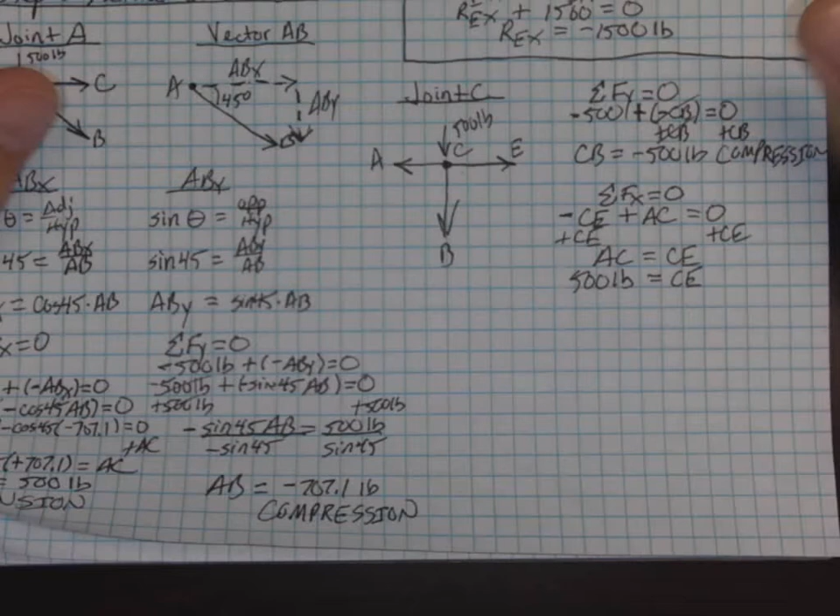Alright, in the last video we walked through the truss members. So right now as it stands, we have 4 truss members accounted for on this truss that we have for number 5 on activity 216. So as we take a look, we've analyzed joint A and we've analyzed joint C, and using those joints we're able to solve for 2 truss members each time. And right now we have 3 truss members left.

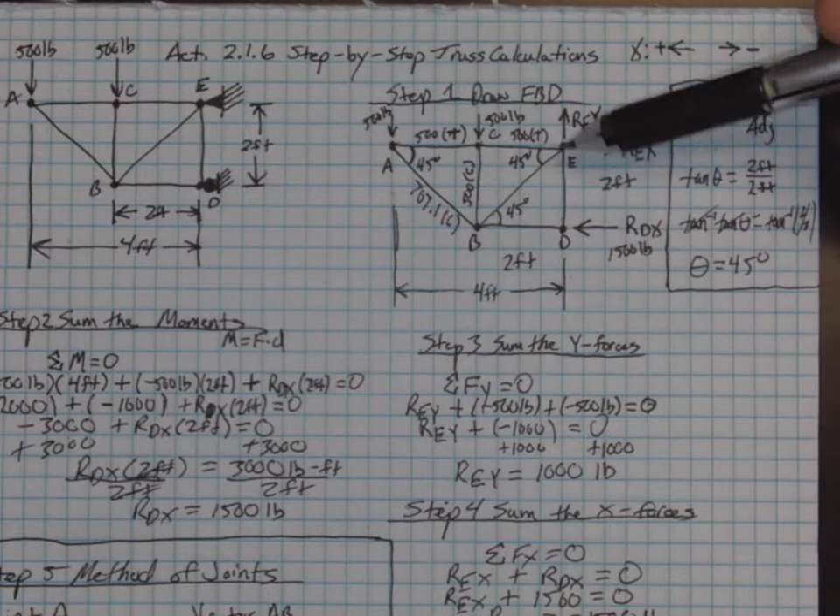And in order to start looking at what joint to use to solve next, I want to pick a joint that has the least amount going on with it. So right now, B has 2 vectors coming off of it. I really want to stay away from that because that's going to be a lot of work to do. E could be a possibility, and even with the support reactions, it just has the 1 vector pulling down and to the left. But I think the one I'm going to focus on here is going to be joint D.

And for joint D, I'm going to draw a free body diagram for the joint in the little bit of space I have left at the bottom. We have a truss member that's pulling up, which is leading up to joint E. We have another truss member that is going to be pulling on the joint over to the left to go over to B. And then we do have the reaction from the roller, which is RDX, that is going to be pushing on the joint as well.

And RDX is going to have 1,500 pounds of force, as we solved for back in steps 1, 2, 3, and lastly 4. Okay, so these are all the forces acting on truss joint D. And now I can start looking at what forces I have left to solve for. Sum of the forces in the y direction add up to equal 0. I only have one y direction force, which would be DE, meaning that truss member is not carrying any force or having to support anything. So DE is equal to 0.

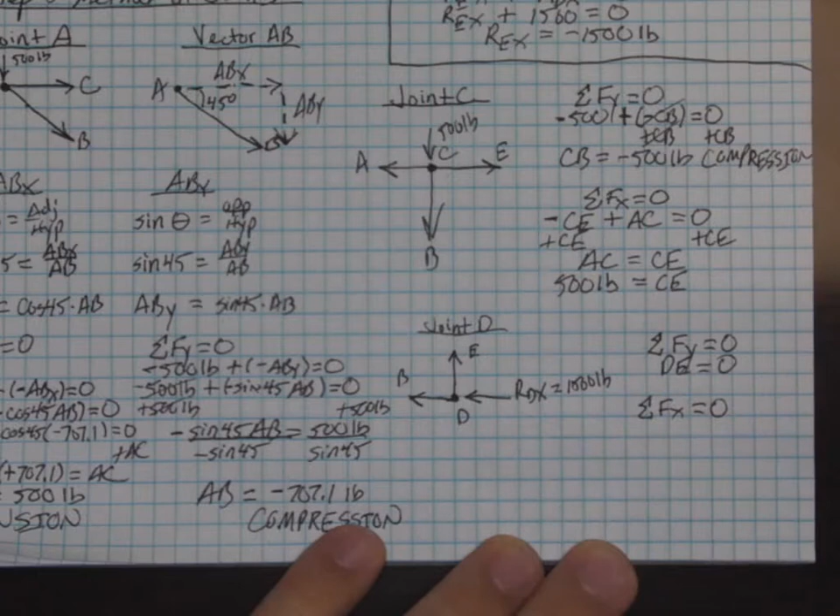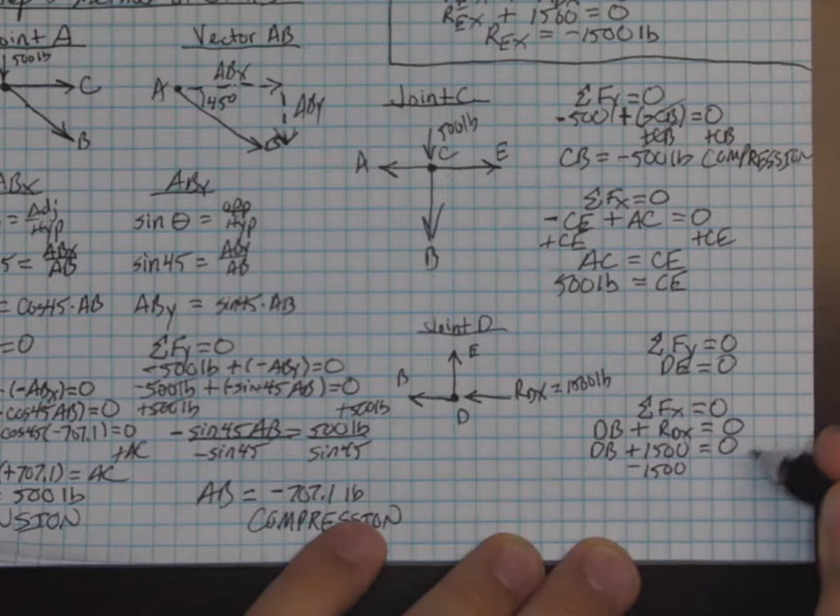And then now, sum of the forces in the x direction. I've got 2 x direction forces acting here, and they are both acting to the left. Again, we flipped that x-axis direction. So we have DB acting to the left, which is going to make it positive, plus RDX, and when I add those together, those are going to equal 0. So DB plus 1,500 pounds is equal to 0. To get DB by itself, I'm going to subtract 1,500 pounds on each side. So DB is going to be equal to negative 1,500 pounds, meaning that this truss member is in compression.

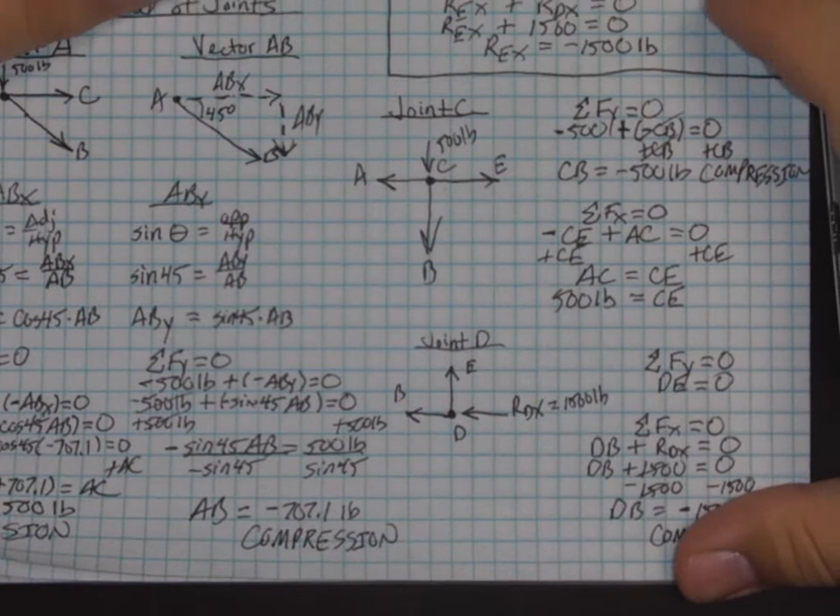And I'm going to take these 2 values and update my free body diagram. So up here on the diagram, below 1,500 pounds, label in parentheses C for compression, and DE, 0 pounds. Alright, now I've got one last truss member to solve for.

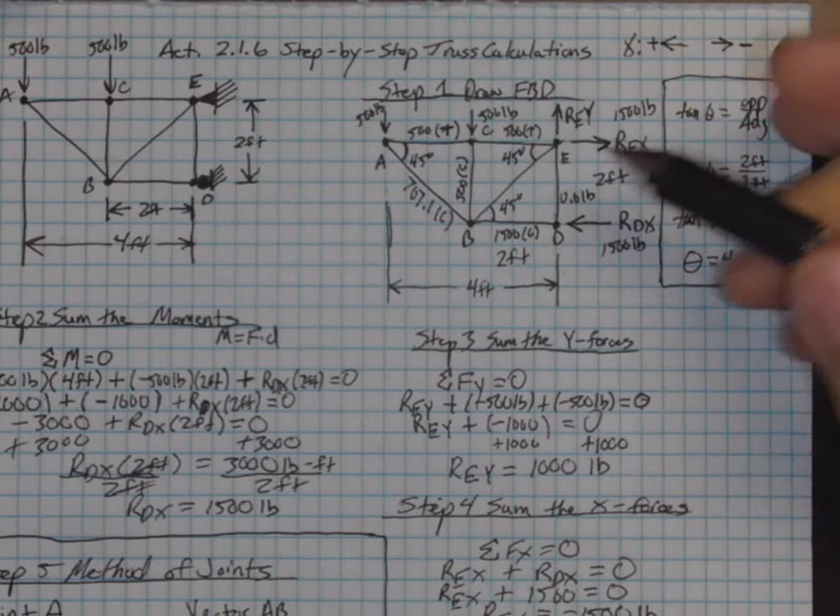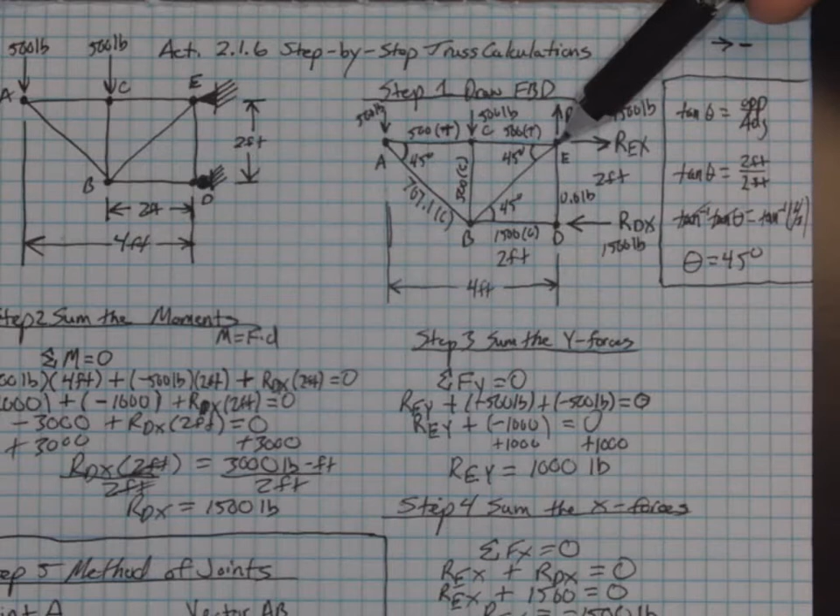So the crossbar here, which is going to be between joints E and B, and I'm going to look at what joint I have left to analyze. Again, I want to stay away from B. It has 2 vectors here. I could use it, but I have to do a lot more work to solve. I think I'm going to move to joint E. I just have the 1 vector, and the other forces are acting in a straight line X or Y direction. So I'm going to have to move to another sheet here to make this work.

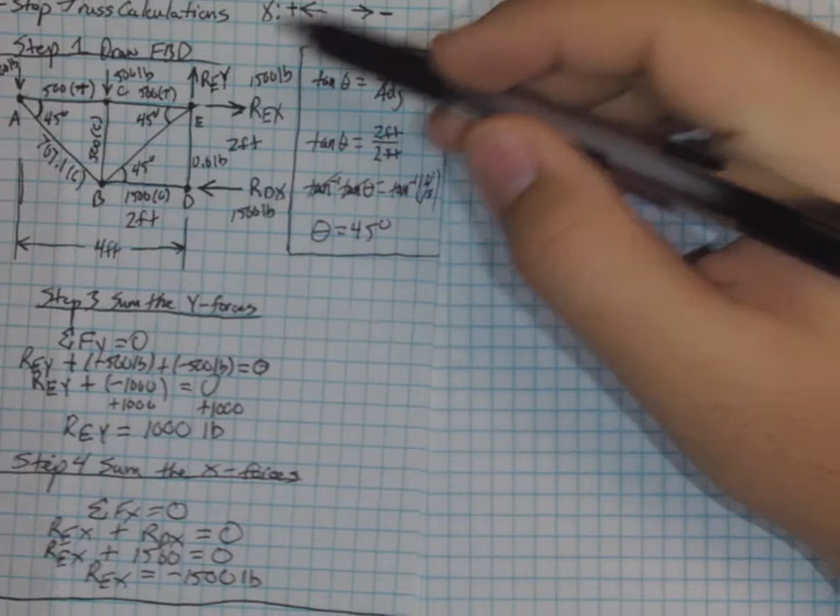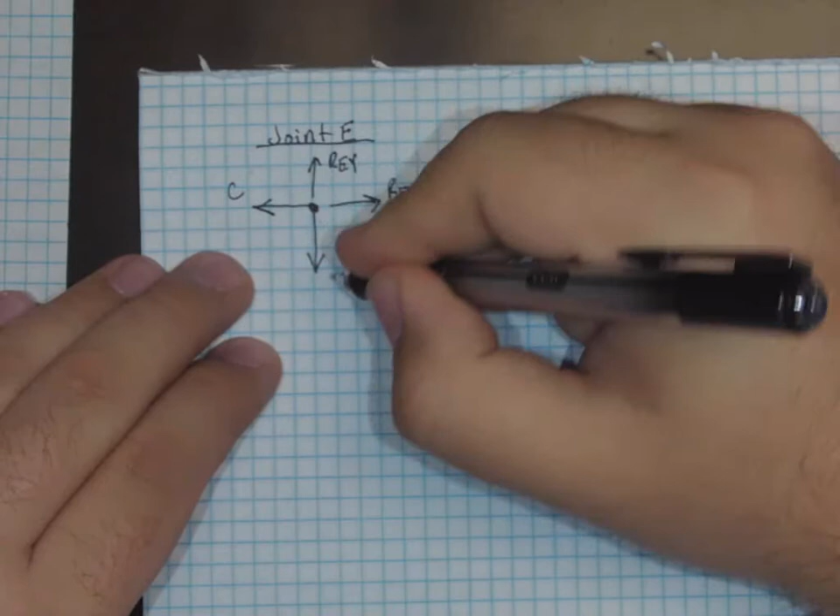And I'm going to draw joint E. So here, joint E's free body diagram. I have the support reaction REY. I have REX coming off to the right. I have a truss member pulling on the joint over to letter C. And I have another one pulling down to D. And then I have another one pulling down at an angle down to B.

So for joint E, we do have a force vector we need to break down. I'm going to call this vector EB. And I'm going to go ahead and redraw the vector and split this into its X and Y components. So in order to do so, I'm going to go over to the left along the x-axis, and then I'm going to go down in the y direction to meet the end of the arrowhead. And I've got 45 degrees there on the angle. So the x component, EBX, y component, EBY.

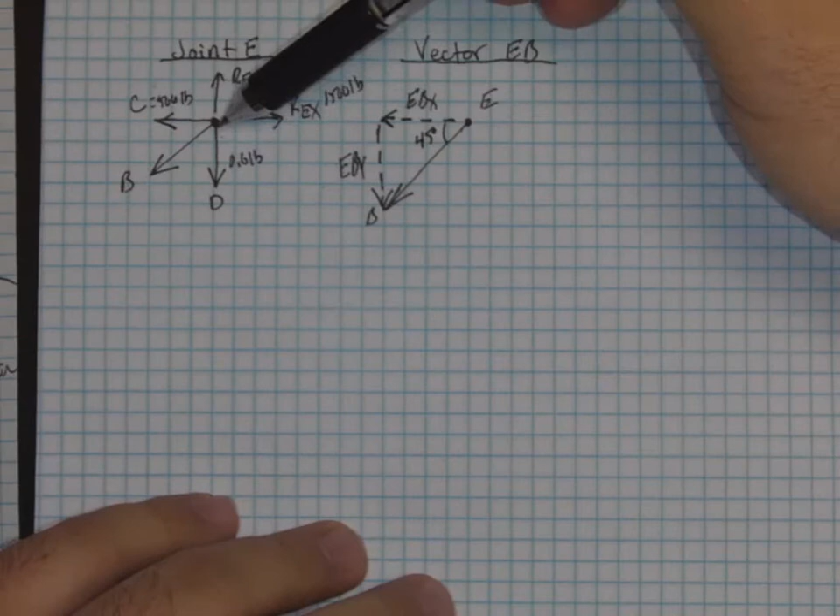This one, however, I'm going to analyze. I only need one truss member. And when I start to look at my truss members, I'm also going to label the magnitudes of my forces that I have to deal with. So as you can tell, I think I'm going to focus on just the y direction, because this DE truss member has 0 pounds, which is going to help me eliminate one truss force that I don't need to account for. So it's going to be a little bit easier to do that way. And so I'm going to go ahead and just deal with EBY, focusing on y direction forces.

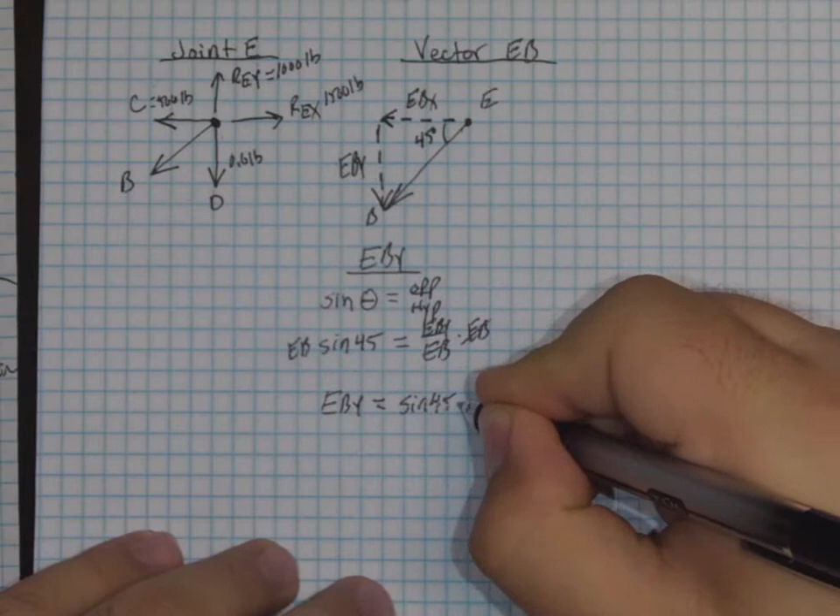This is the opposite side of the triangle, meaning we're going to use sine. Sine is opposite over hypotenuse. And when I plug in what I know, sine of 45 degrees is equal to EBY over EB. And then I'm going to solve in terms of EBY. So all I've got to do is multiply by EB on each side. And that's going to be EBY is equal to the sine of 45 times EB.

Okay, now I can take a look at the sum of the forces in the y direction, and they add up to equal 0. Here I have REY acting upward. I'm going to call this DE, so I do plus a negative DE, since that's acting downward; that's a common notation we used in the last joint. And then I need a negative EBY, looking at my vector moving downward. And when I add those together, they should add up to equal 0.

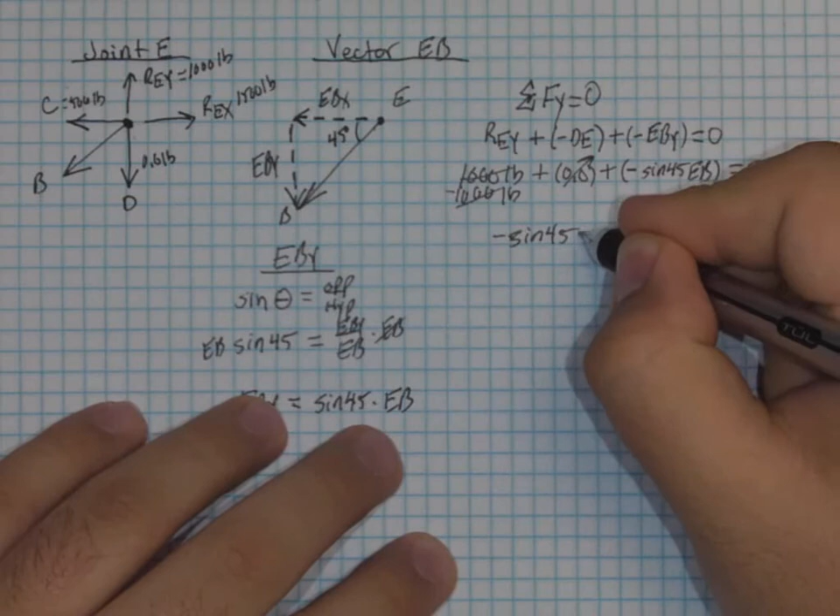So substitution, REY was 1,000 pounds. My DE was 0, so I could pretty much write that one out. And then plus a negative sine of 45 times EB, and that's going to be equal to 0. So rearranging the equation, I'm going to subtract 1,000 pounds from each side to balance. So I've got the negative sine of 45 times EB is equal to a negative 1,000 pounds. And in order to get EB by itself, I'm going to divide by the negative sine of 45, which is in turn going to make this answer positive.

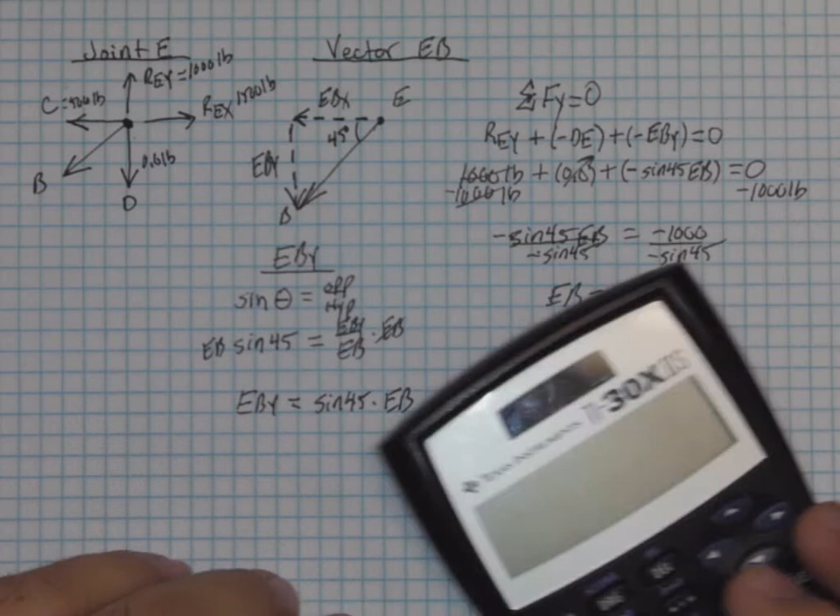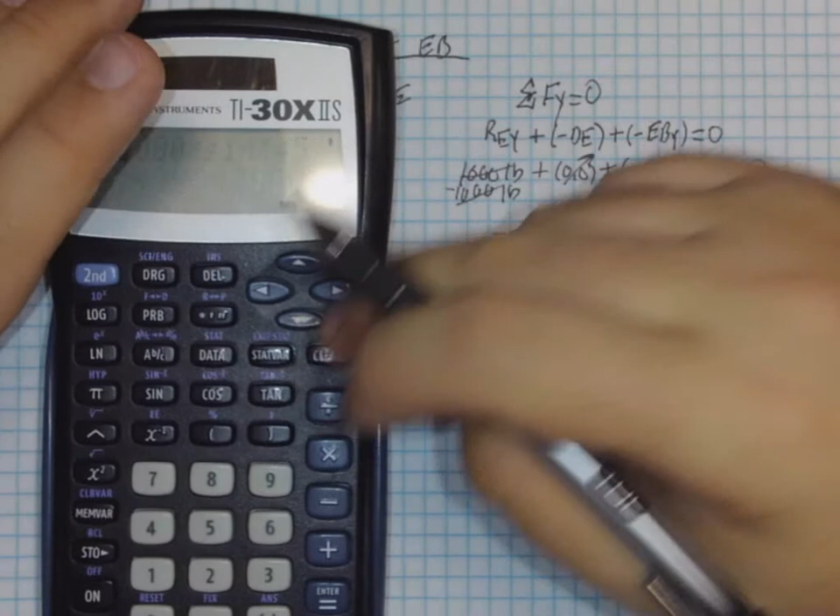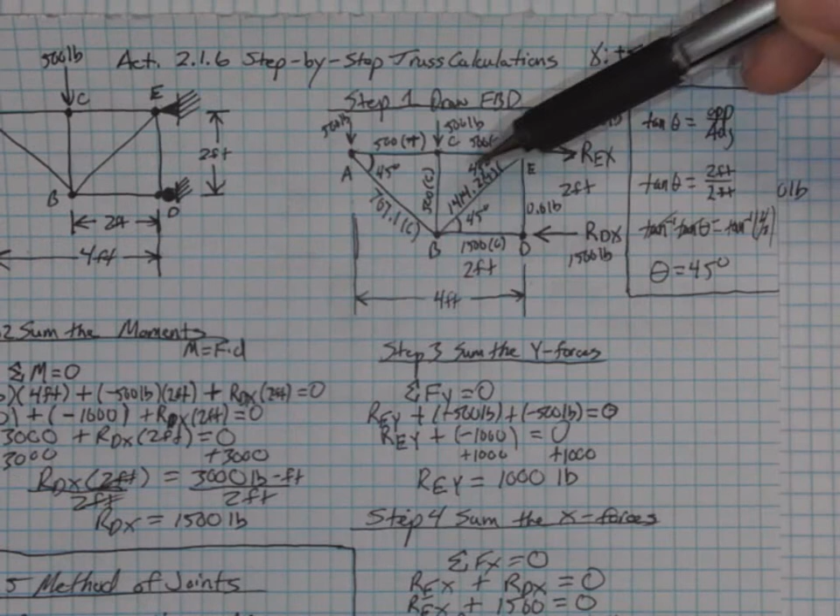So utilizing my calculator, 1,000 divided by the sine of 45 is going to give me 1,414.2. Again, our precision is just to the tenths place, 0.2 pounds. And this is in tension. So, update my free body diagram. This is the truss member, 1,414.2 in tension. So this completes our truss calculation for number 5 on activity 2.1.6.

And what you'll see when you come back to school, or when you're able to get to it, is you can actually check these in MD Solids using the trusses module, and check the answers to make sure that we've got the right solutions to the truss problems.